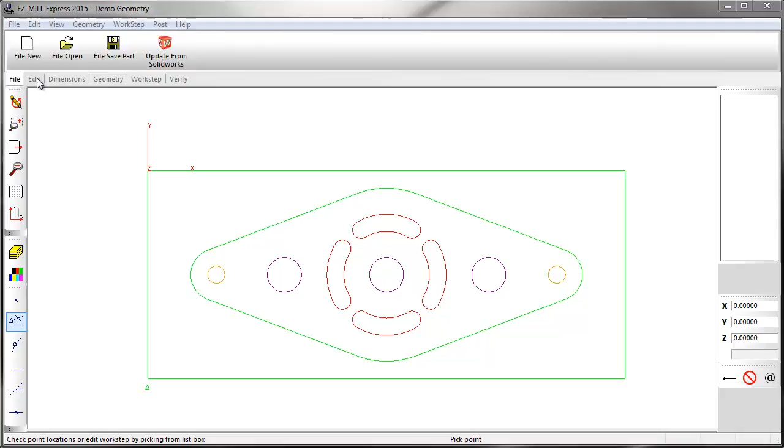Welcome to EZ-MILL Express, one of the most popular CAD-CAM softwares on the market today. Here we've imported a CAD file. This will save us much time in the machining process. At the end of the video, I'm going to show you how to create this part using EZCAM's powerful geometry tools. Let's start by moving our coordinate system to the center of the piece.

Select the desired location, then the location of our coordinate system. With the geometry in place, all we need to do is focus on the machining. I'll start with our slots and create a pocket work step. As the wizard appears, you'll notice there are some predefined values. Those were set as default earlier.

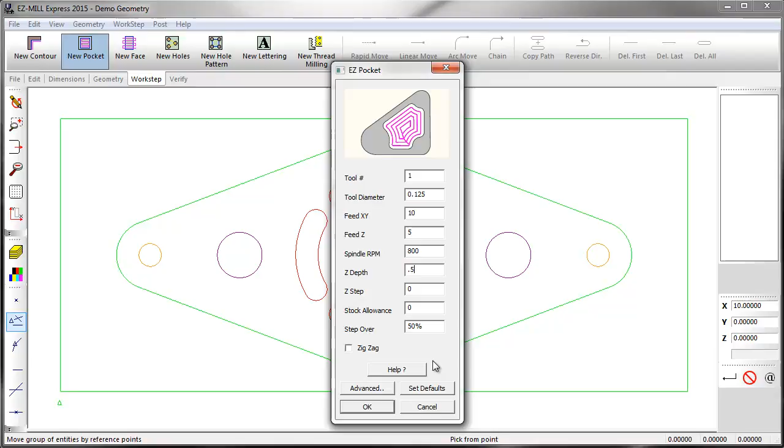Attributes in the background have also been set as default. This allows you to focus strictly on the wizards. Feeds and speeds can be calculated automatically in the background as well. Now I'm going to select the slots by color, and in 2 mouse clicks I have the machining.

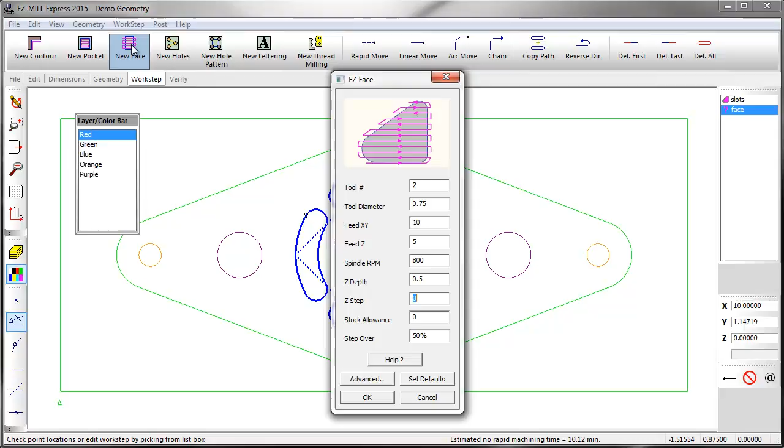Next I'm going to face the stock up to the part boundary. I'm going to leave a stock allowance for a finished contour operation. Now the comp number is the register number at the machine where it stores the radius or diameter value for cutter comp.

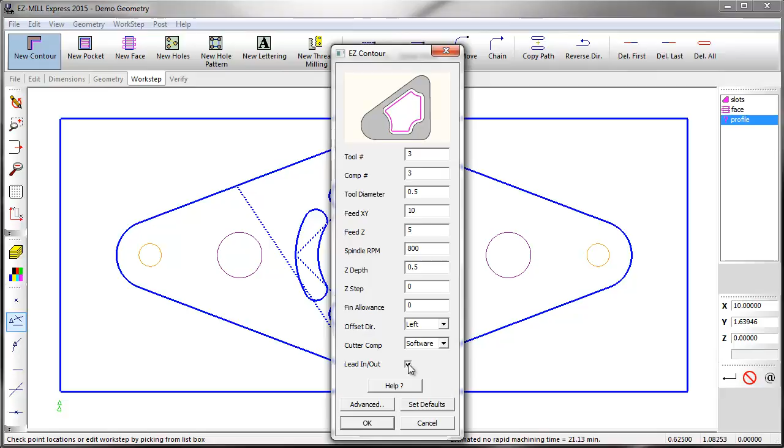Offset direction left for climb mill, right for conventional. If you're going to use cutter comp, you would choose either machine or both. If not, choose software, and EZCAM will generate an automatic lead in and lead out. If you want to control those parameters, you can go under the Advanced tab.

Now I'm going to choose where I want EZCAM to start. Notice the convenient ramp on and ramp off, and you can also set an overlap. Now we'll focus on the center holes. You have several cycle types to choose from. Deep hole and chip break will give you a pecking cycle.

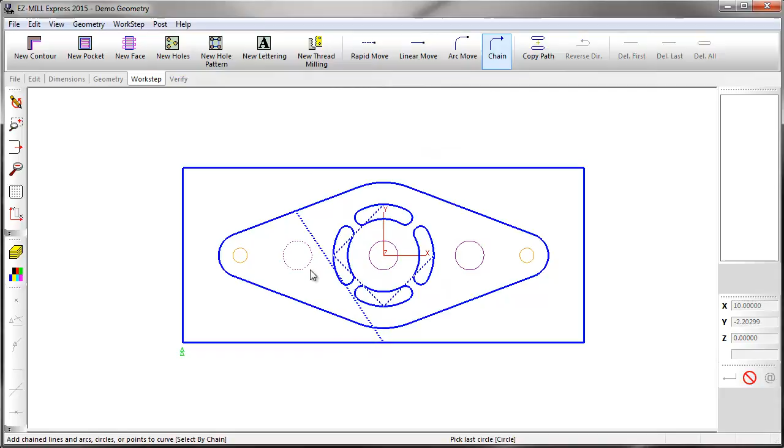Select your first hole, then the next hole, and EZCAM will go throughout and find all the diameters of the same value. Now you could exclude those holes by either hiding them, or you can toggle rapid and exclude them manually. I'm going to add it back in. And EZCAM picks the direction based on the settings in the setup.

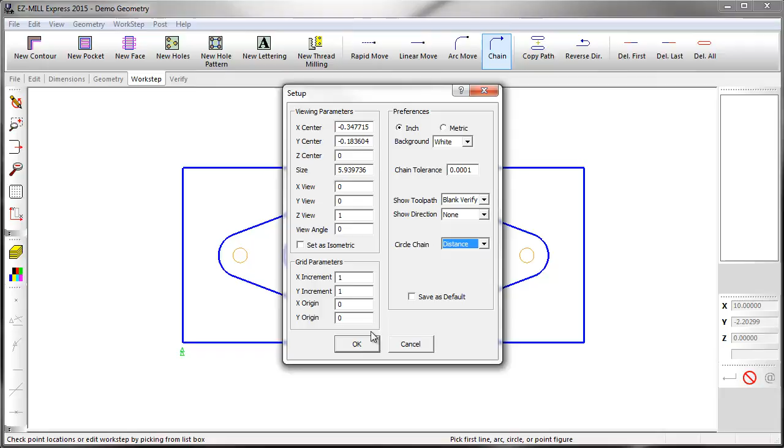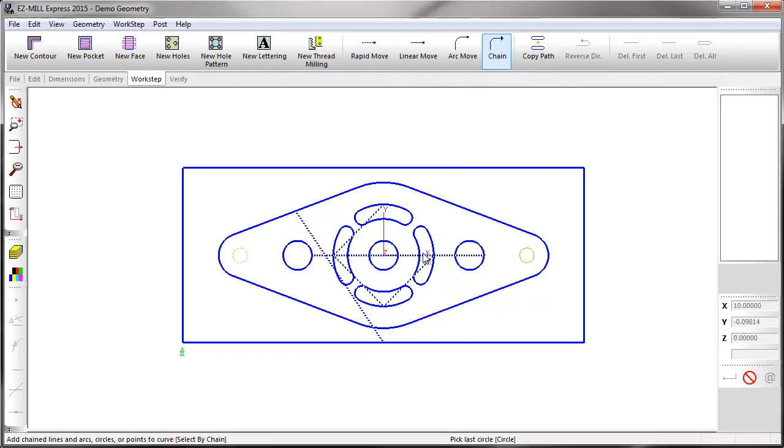Now I'll focus on the outer holes. Now I'll apply a thread milling work step. The thread milling wizard is very simple to follow. If your machine supports cutter comp on helical thread milling, you can choose machine or both. There are 3 types of thread mills.

Whether it's an inside or outside thread, and the number of threads per inch. A ramp in and ramp out feed. Whether you're going to plunge the cutter to the bottom of the hole and then feed up, or if you're going to ramp it from the top and feed down. A cut step is starting at the root diameter and walking up to the finished wall. You can set a stock allowance that you might use for a plug gauge.

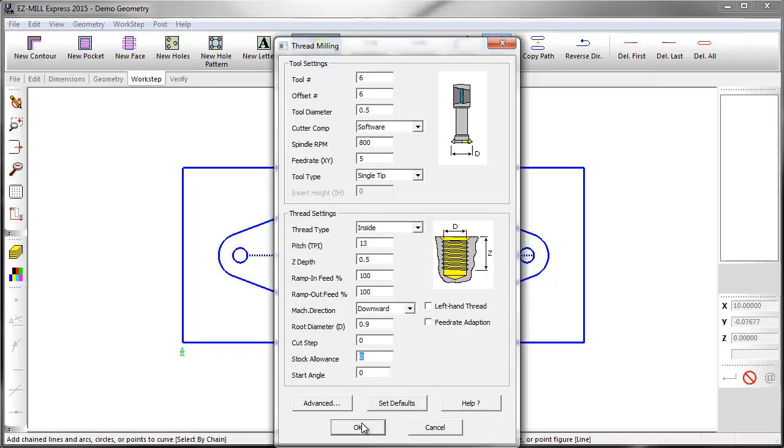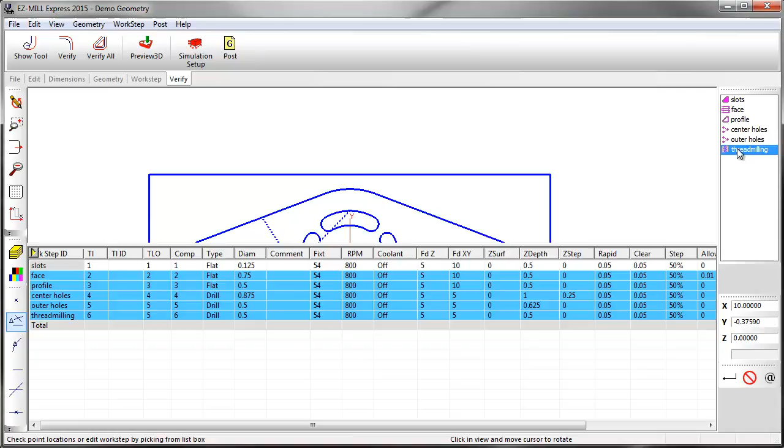There is a spreadsheet that can be printed and taken over to the machine, or you could change any of the values that you'd like in the spreadsheet, and those values will update in the work step. I'm going to adjust my operations and put the face mill before the slots using my arrow keys.

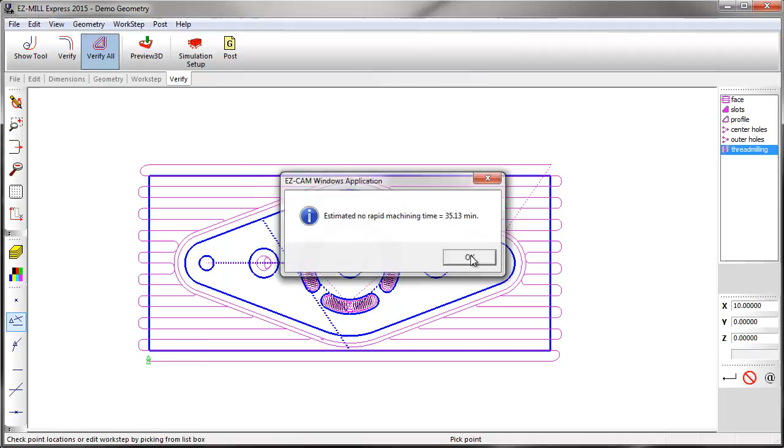Now when I verify all, I get a machine time. There's a 3D preview so you can save yourself from any mistakes out at the machine. You can slow the simulation down, you can speed it up or pause it, and then single step through.

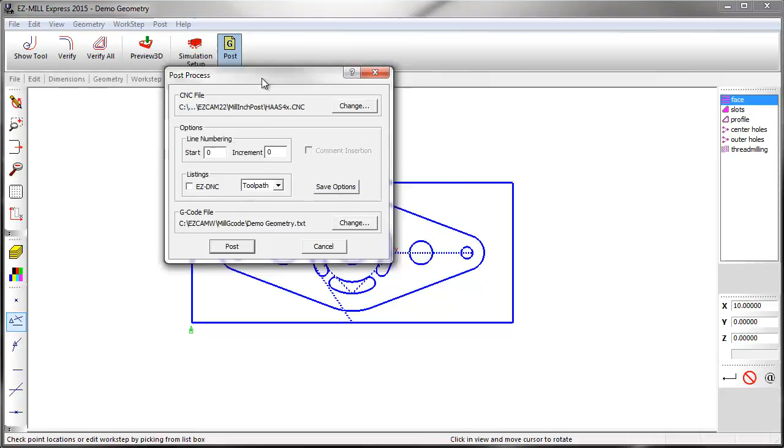Then you go to post your code. You can choose from an extensive library that's included with the software. You get 1 year support and maintenance with your purchase, so if you need an adjustment to your post processor, within that year we'll take care of it. We do supply an editor, so if you're savvy enough, you can make your own modifications in a matter of minutes. If you need us to build a post processor from scratch, we can do that as well.

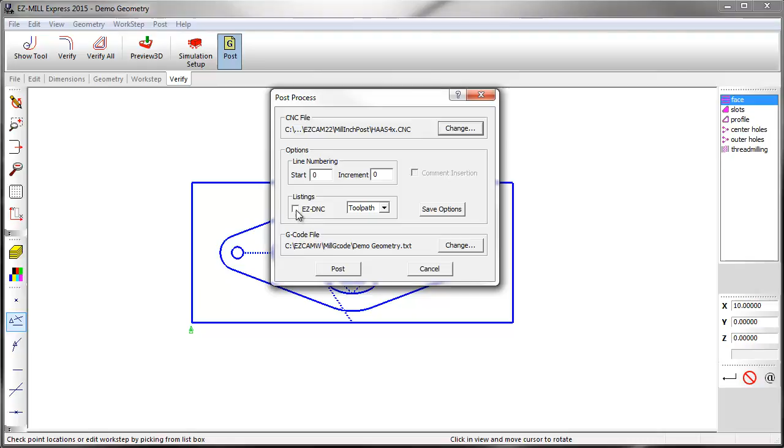You can insert line numbers so you can follow along in your program, otherwise known as sequence numbers. You can save your G-code file to a floppy disk, a thumb drive, to your hard disk, or you can send the program through an RS-232 cable using our EZ-DNC Express software, which is also included. So this part is completed.

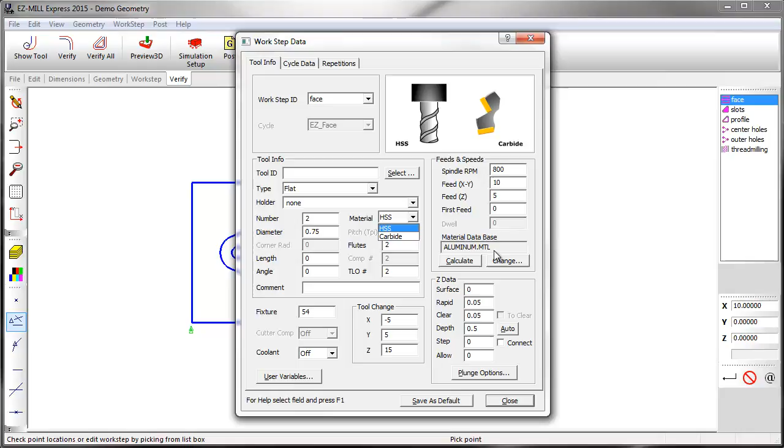Now we can talk about some of the attributes in the background. Under Advanced, you'll find things such as your speeds and feed calculator, and that's based on the tool material and the part material that you choose from the library. You can also modify the values in the library if you choose. Hit Calculate, and if the RPM exceeds the max RPM on your machine, we can adjust the spindle RPM and the feed rates based on the post processor settings.

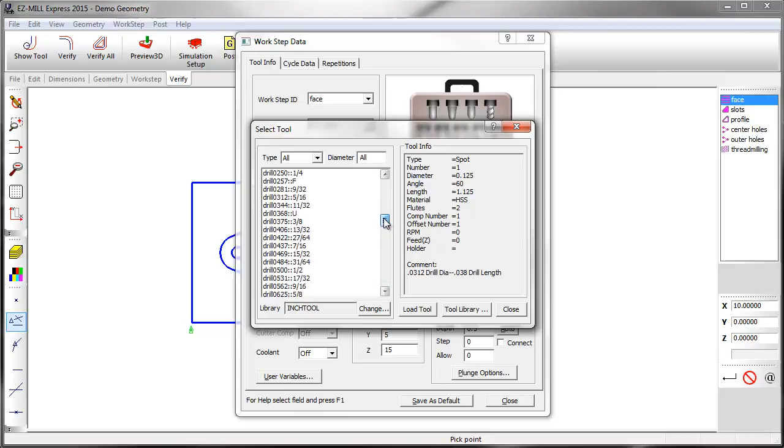There's an extensive tool list found in our library that's included. You can make your own library, you can make new tools, and you can set properties such as tool number, RPM, feed rates, and the such. When you load your tool, all these fields will update under the tool info section.

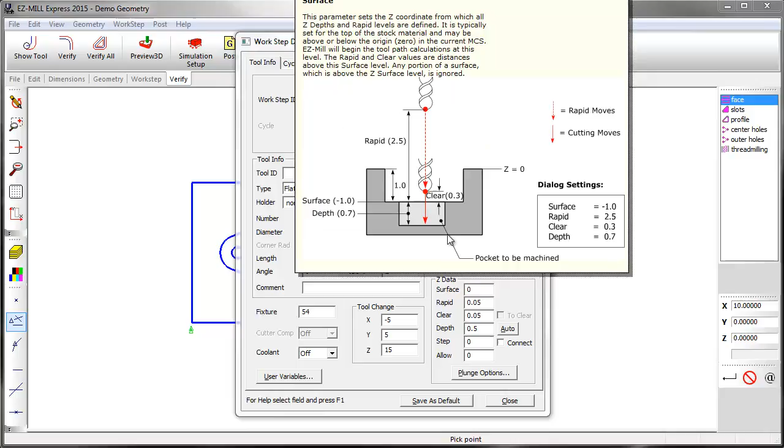Now EZ-CAM has made it convenient. We give you a graphic in the upper right-hand corner. So when you click on a field, you'll get an updated graphic. You can also go to the context-sensitive help found up here in the upper right-hand corner. Select your field, and in this case, we give you a written and graphical explanation.

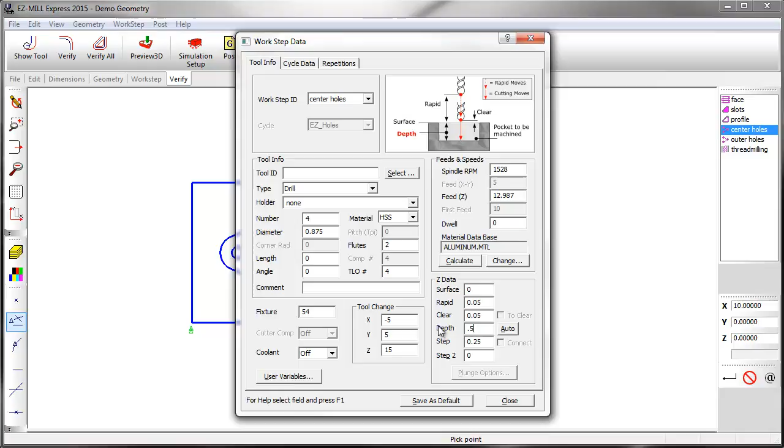Now let's talk about a drill cycle for a minute. If I put my depth at the thickness of the part, 1/2 inch, and I add the drill tip angle on the drill, by hitting auto again, the body of the drill is at the 1/2 inch, and we compensate for the drill tip angle.

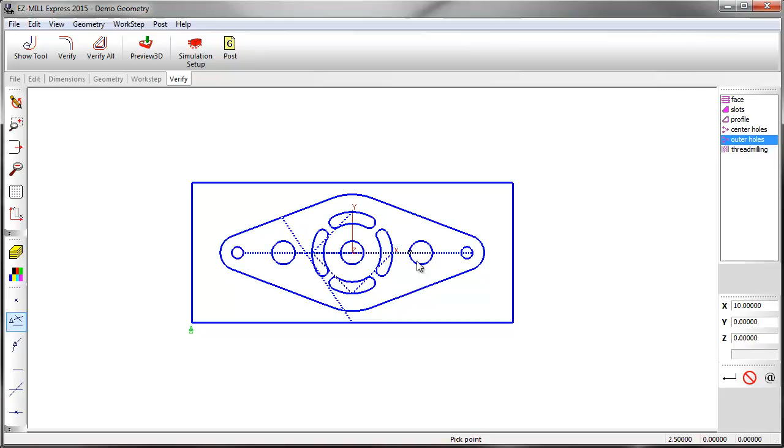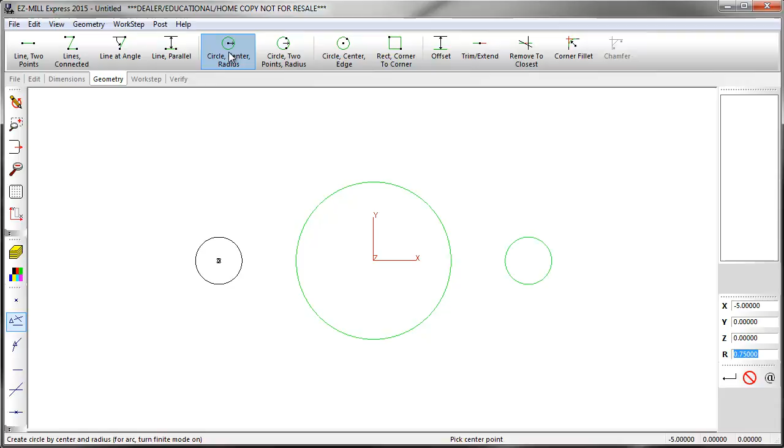Now I'm going to complete this video by creating this part for you. We'll use the Geometry tab, circle center and radius, and the center radius is 2.5 inches. Then our radius changes to 3/4 on both ends. And then we have a line tangent to these circles. So we'll pick a line at 2 points.

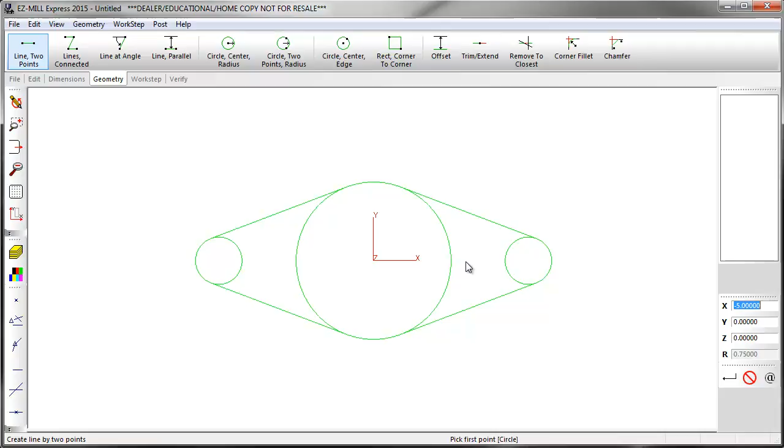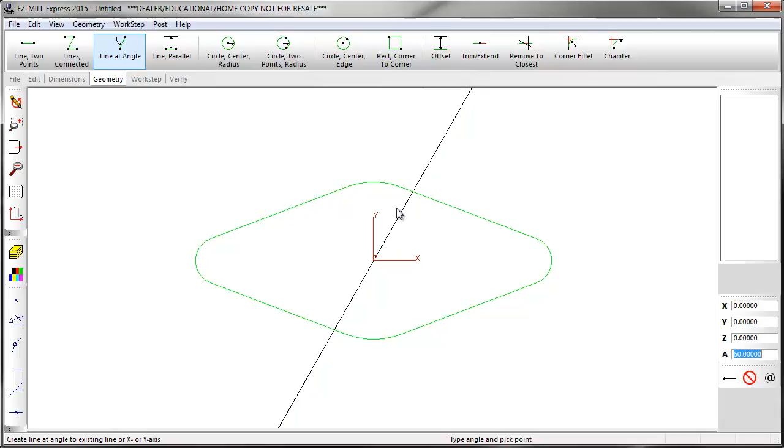Oh, we need our tangency snap. And you can see the possibilities. Now we'll remove the center geometry using remove to closest. And then we'll pick our center lines. We'll reference off of this line here by 60 degrees. The center of our slot is 1.5 inches. And we'll offset by the radius of the slot by 1/4 inch on both sides of the center circle.

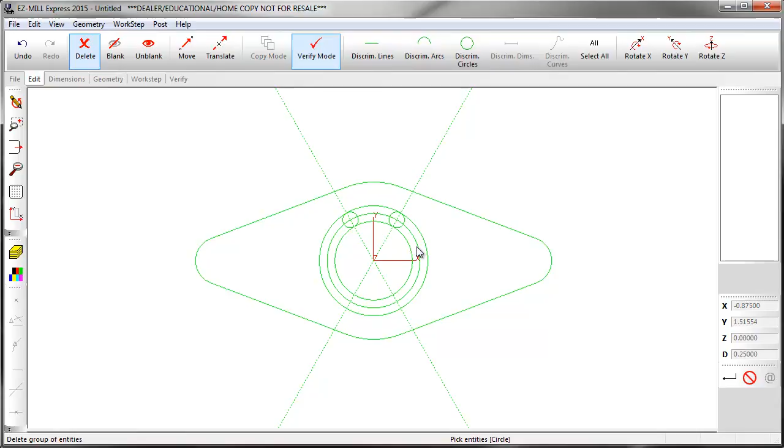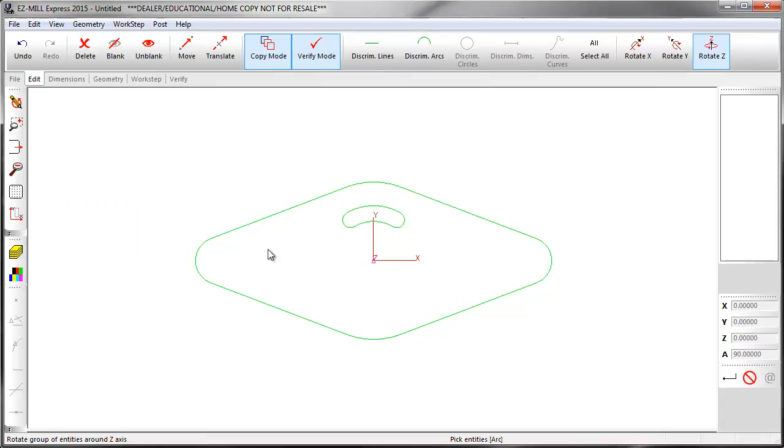We'll choose center and edge for creating our circle. We'll remove our reference lines in the center circle. And back to remove to closest. Now we have to rotate the slots and make 3 copies. Select our slot. Now we'll create our center holes.

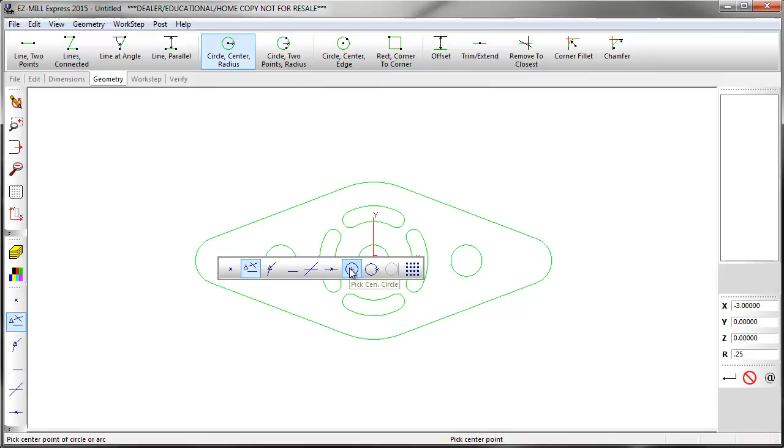And the outer holes. And we'll snap to the center of the arc by choosing Pick Circle Center. And lastly, we'll create our stock, and we'll use rectangle from corner to corner. I'm going to use a grid to assist me. And it's complete.